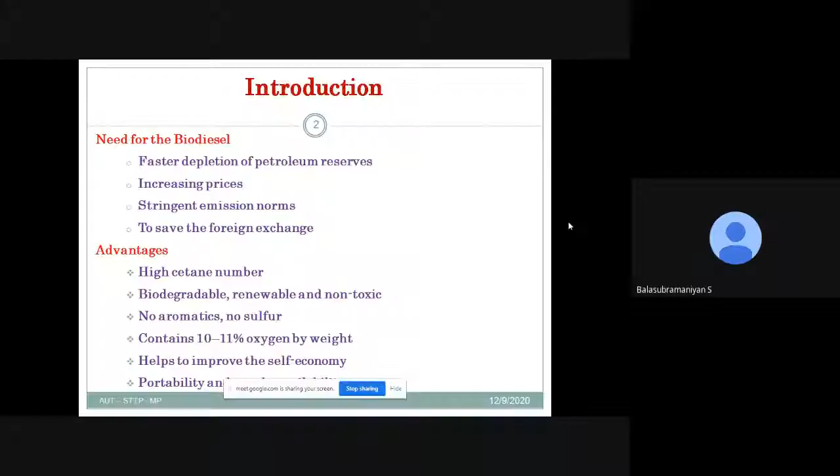What's the need for the biodiesel? Many people might have covered this topic, but let me refresh it and then we'll go to the topic.

The main need for biodiesel is the faster depletion of petroleum reserves, increasing prices of fossil fuels, stringent emission norms, and to save foreign exchange. Not only biodiesel, we can go for alternative fuels, and among them biodiesel is the promising one. So I have taken biodiesel as my fuel for the research.

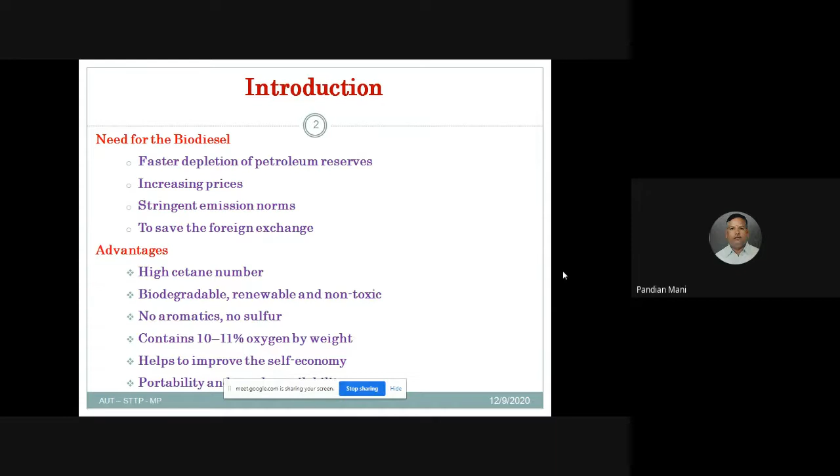The major advantages of biodiesel are high cetane number, biodegradable, renewable, and non-toxic. It contains no aromatics, no sulfur, so there is no problem of acid rain. It contains 10 to 11% oxygen by weight, which is useful for better combustion, and it helps improve the self-economy of any nation.

And it is easy to transport, readily available, and underutilized. So we can make use of this biodiesel as an alternative fuel.

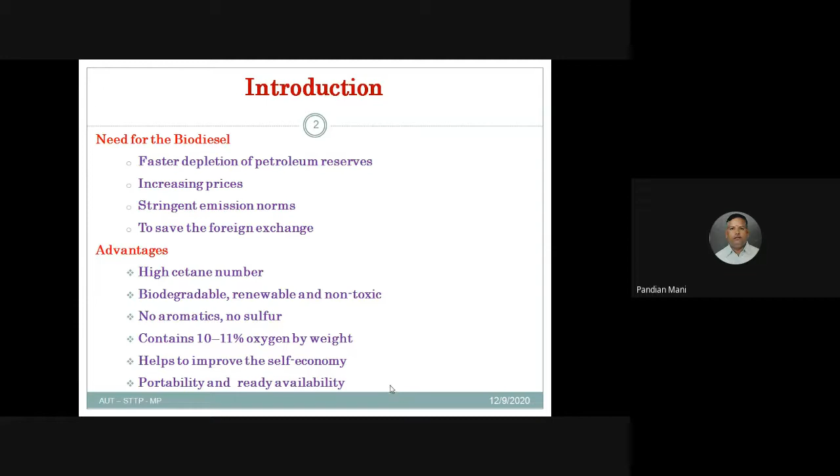Biodiesel is not readily available and it is available as non-edible vegetable oils. These vegetable oils have to be converted into biodiesel by means of acid esterification or base esterification, according to the acid values. So this is the introduction regarding biodiesel usage in ICE engines.

The drawbacks of biodiesel are that it contains lower energy content as the fuel has oxygen in it, so it has lower energy content and is slightly viscous and inferior. It has inferior brake thermal efficiency and more NOx emissions.

So when using biodiesel as a fuel in ICE engines, NOx emission is the major problem that is incurring. We have to identify ways and means to reduce the NOx emission from biodiesel fueled engines so that it can be used for a longer period without any problems. That's why my project aims to reduce the NOx emission from the...

Pandian sir. Yes, sir. Sir, a little louder please. Oh, okay sir. So this project aims to reduce the NOx emission from biodiesel fueled CI engines, sir.

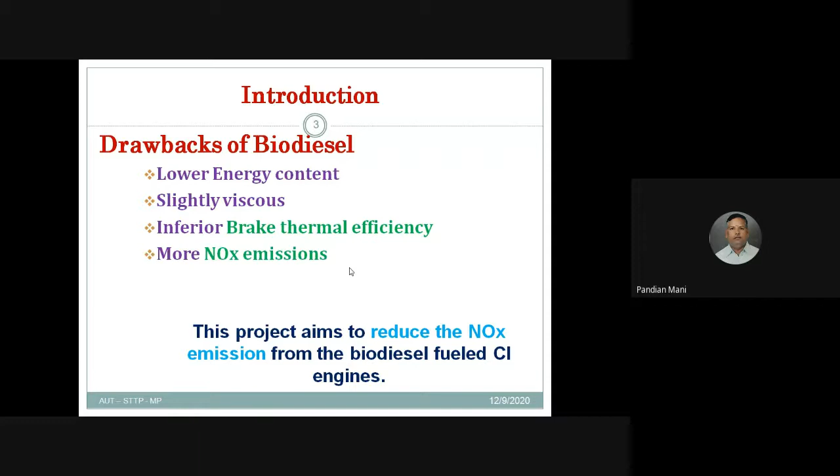I have selected the fuel as Pongamia biodiesel. I selected this because it is available throughout India, it is underutilized, gives a high yield of Pongamia oil from the seeds, is tolerant to high salinity so it can be grown in any location, and it can be grown in waterlogging areas. It is non-edible, that's why I have chosen Pongamia oil as the fuel for my work.

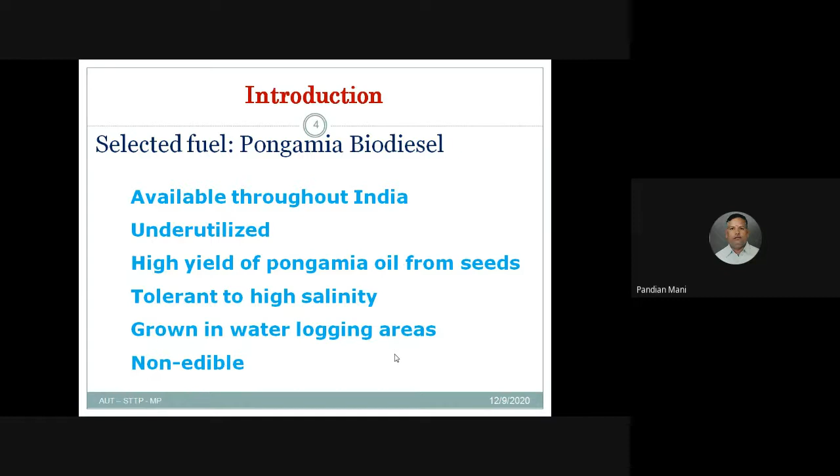There are many ways and means to reduce NOx emissions: modification of engine parameters, recirculation of exhaust gas, usage of cetane improvers, and use of retrofitting devices. But I have taken only the modification of engine parameters as the topic for discussion today.

By controlling the in-cylinder combustion process, as academicians we know very well that NOx emission can be formed only at very high temperatures. At a lesser in-cylinder temperature, NOx emissions will not be formed. Only at higher in-cylinder temperature are NOx emissions found.

Excuse me sir, sorry to interrupt, participants are saying your voice is not audible. Oh, I will check, one minute, I think the system setting needs increasing. I will check it... It is full now, the volume is full. Is it audible now? For me it is okay, I am using an earphone. Many participants have given a comment in the chat box. I don't know where the problem is. Let us see... proceed please.

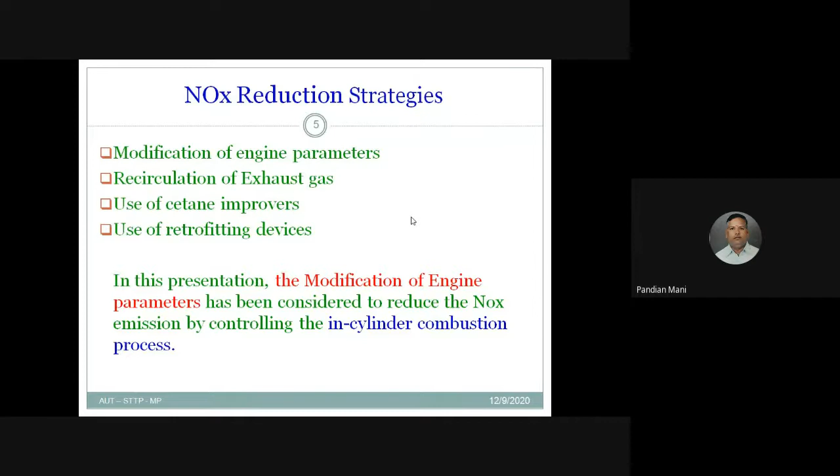Why modify the engine parameters? Because the existing engines are not designed for biodiesel usage. They have been designed only for petrol and diesel usage. So the parameters that can be modified are the bore and stroke (engine size), the compression ratio, and fuel injection parameters like injection timing, injection pressure, and nozzle tip protrusion.

In our research, I cannot change the bore size, stroke size, and compression ratio, because those have to be decided during the design stage itself, not at a later stage. So I am not going to change the bore, stroke, and compression ratio. However, I can change the fuel injection parameters like injection timing, injection pressure, and nozzle tip protrusion.

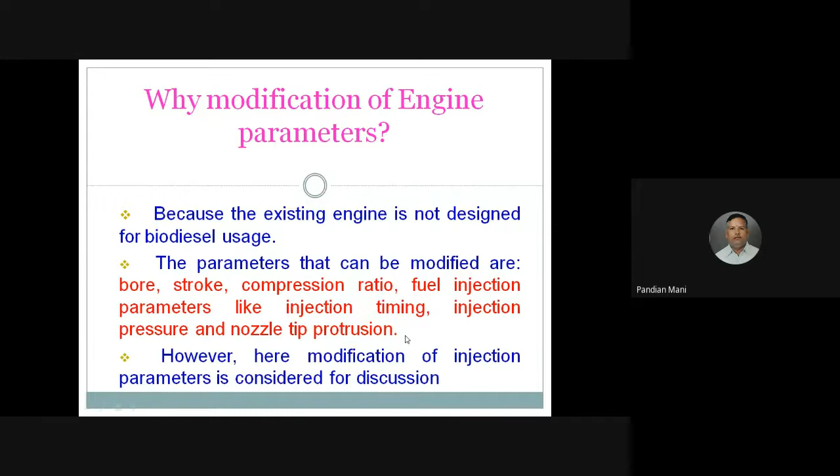Hence, I have considered injection timing, injection pressure, and nozzle tip protrusion as the parameters subject to modification. The objective of this work is to conduct tests on a compression ignition direct injection engine using different blends of biodiesel with petrol diesel, such as B0, B20, B40, B60, B80, and B100, and to obtain the optimum blend and the baseline data.

As you know, B0 indicates fossil diesel, B20 indicates 20% biodiesel mixed with 80% conventional diesel, and B40 means 40% biodiesel mixed with 60% conventional diesel. So the combinations have been formed like that.

The necessity for this is to find the best blend at which the engine works better, giving higher efficiency and lower brake specific energy consumption. In our experimental study, I found that B40 is the best suitable blend for use in existing engines. So I have chosen B40 as my biodiesel blend for use in the ICE engines.

And here, I have chosen the injection parameters as subject to change. In many major research articles, I found that they have studied individually the effects of injection timing, injection pressure, and nozzle tip protrusion, but they have not studied the combined effects of injection pressure, injection timing, and nozzle tip protrusion. That's why I chose this.

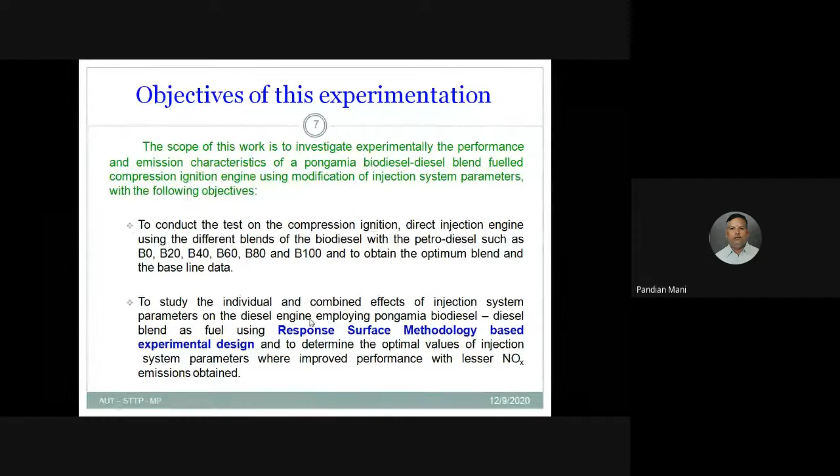So I have used response surface methodology based experimental design.

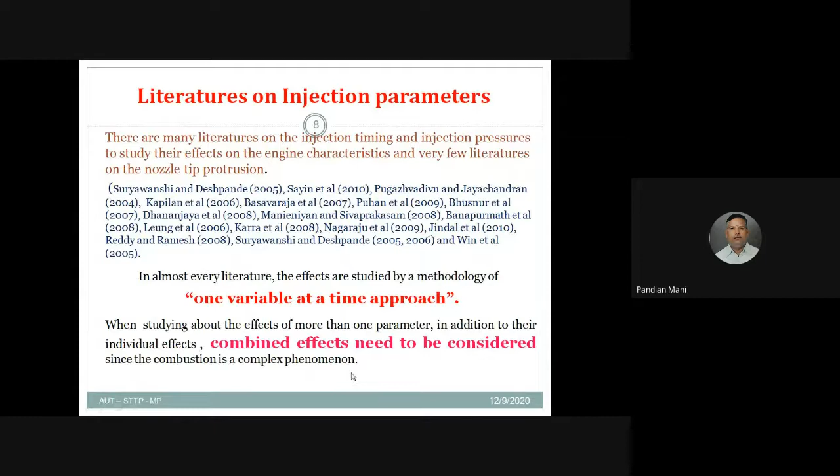Here I have given the literatures that I have gone through. In almost all the literatures, they have studied using a one-variable-at-a-time approach, but in order to study the combined effects, since combustion is a complex phenomenon, we need to study the combined effects of all these parameters.

To study such multivariate problems, there are many tools available, such as fuzzy logic, neural networks, and design of experiments. In this work, I have chosen design of experiments as a tool for studying the combined effects, because it is the most efficient, economical, and user-friendly tool, and it provides the best result with the least number of experiments.

These parameters have been varied at different levels. I have chosen 5 levels of variation in injection timing and injection pressure, and 3 levels of variation in nozzle tip protrusion. The injection timing variation levels are 18, 21, 24, 27, and 30 degree crank angle before top dead center.

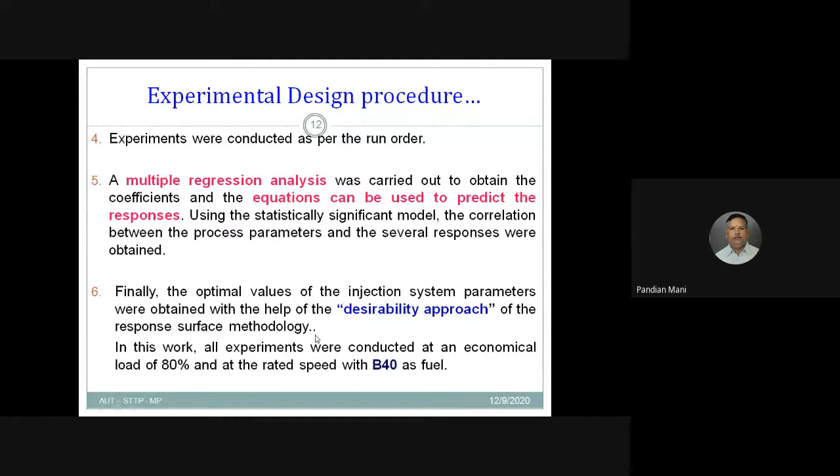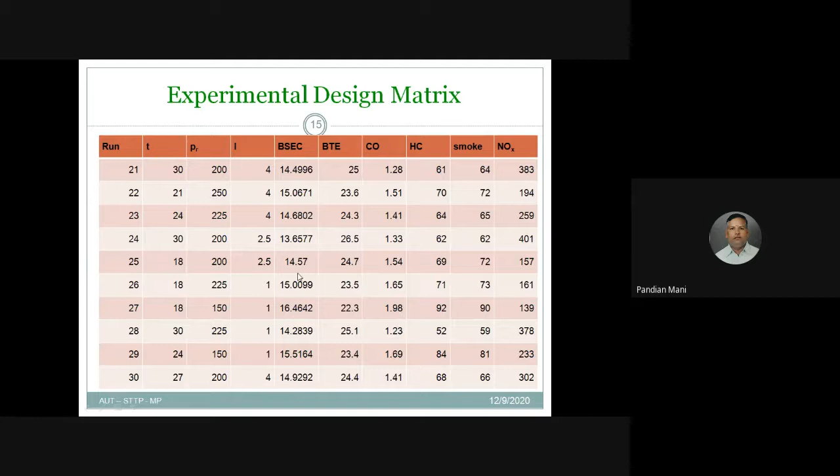So there were 50 runs in total. The experiments were conducted, and it took almost 1 month for conducting all such experiments, because we cannot change the pressure in our laboratory itself.

The injection nozzle has to be taken to the fuel injection service center, where the pressure is changed with the help of tightening or loosening the nut that is held over the compression spring of the nozzles, and it has been varied. The injection timing has been varied by either increasing or decreasing the number of shims added below the injection pump.

This is the nozzle tip protrusion. The injection nozzle is held over the shims. Normally one shim will be there, and by means of increasing or removing the shims, the nozzle tip protrusion length can be changed. So the variations have been performed like that.

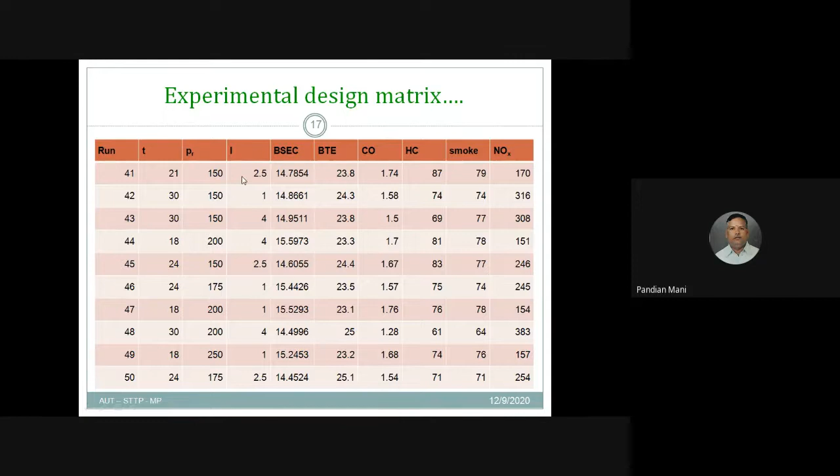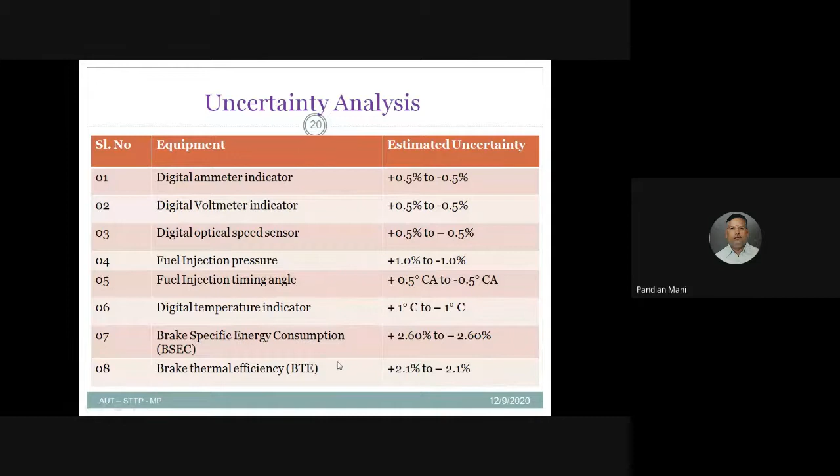I think this has been covered by many people, so I don't want to repeat the same again.

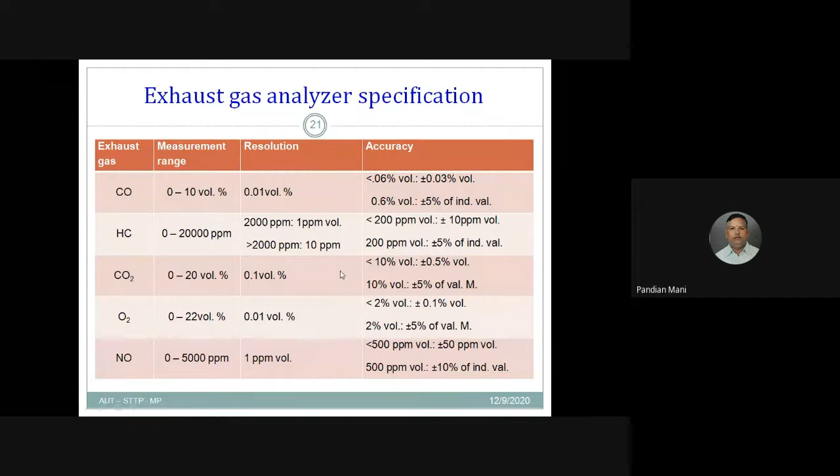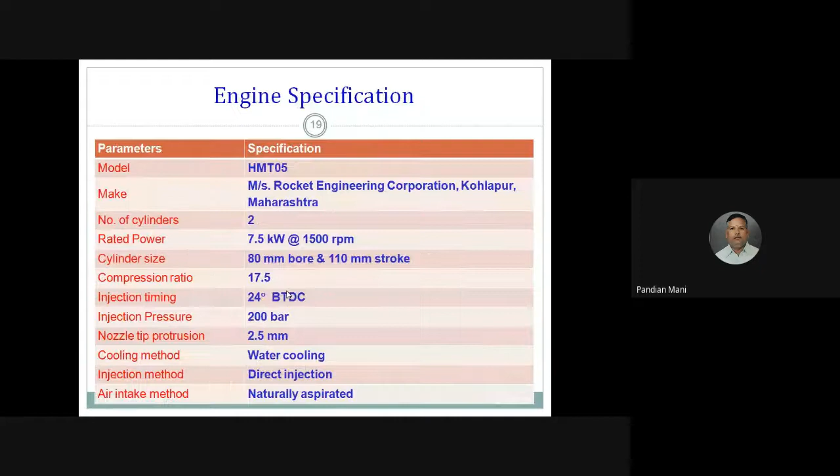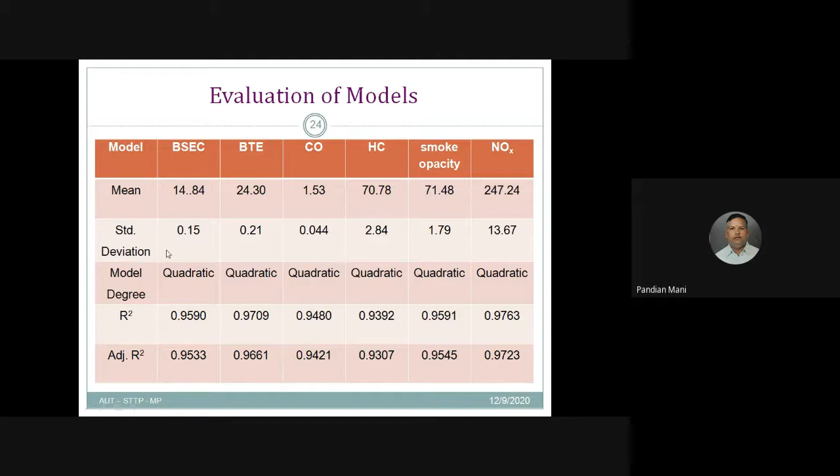And this is the evaluation of the models. Here for each model we have estimated the mean, standard deviation, model degree, R squared values, and the adjusted R squared values. And we found that almost all the models developed for the input parameters as well as for the responses are quadratic models. The standard deviations and mean values have been noted down.

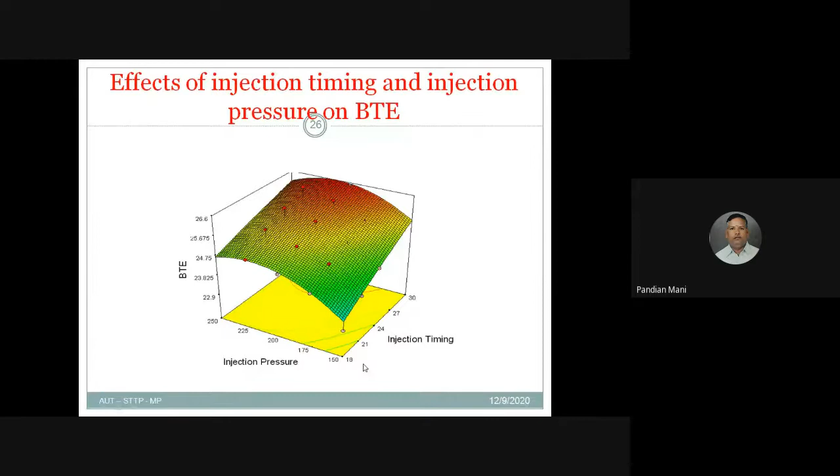This is the effect of injection timing and injection pressure on brake thermal efficiency. Please note, brake thermal efficiency is maximum at an injection pressure of 225 bar, and at an injection timing of 21 degrees we have the highest brake thermal efficiency. Whereas at 30 degree injection timing, the brake thermal efficiency values are changing according to the injection pressures. When injection pressures are increasing, brake thermal efficiency is also increasing, but at the pressure of 250 bar, there is a decrease in the brake thermal efficiency. Similarly, by retarding the injection timing we get lower brake thermal efficiency. Only at 21 degrees it is reducing by reducing the crank angle injection timing; here the brake thermal efficiency value is reduced.

And similarly, this is the effect of injection timing and injection pressure on CO emissions. I hope it is readily and easily understandable, since mostly we may be mechanical engineers with thermal specialization, so you can readily understand the causes of such a parameter. Please note that with the increase in injection pressure, CO emissions are lesser, but this holds up to 225 bar; whereas at 250 bar, we may notice a slight increase in CO emissions. Similarly, CO emissions are very high at 18 degree crank angle before top dead center, whereas at 30 degree crank angle injection timing, the CO emissions are lesser.

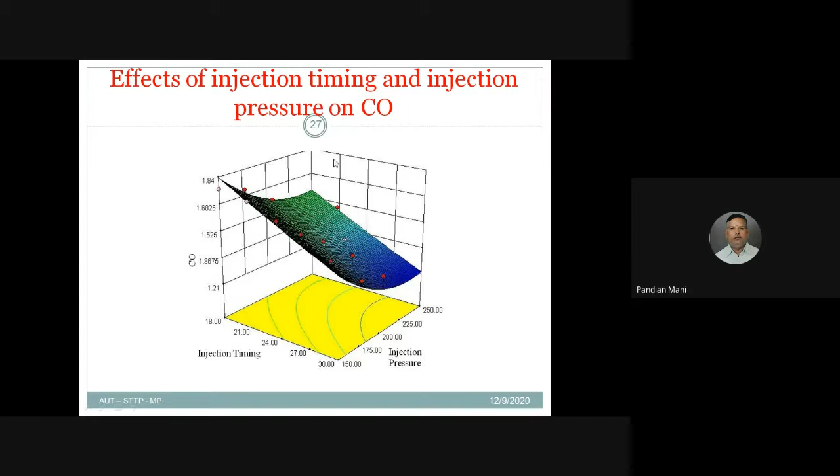We can also visualize the combined effects of injection timing and injection pressure with this graph. This is the NOx emissions, showing the effects of injection timing and injection pressure on NOx emissions. Please note that NOx emissions are very high at pressures of 250 bar and 225 bar, and similarly at a crank angle injection timing of 30 degrees. Whereas at 21 or 18 degree crank angle, the values are found to be lesser.

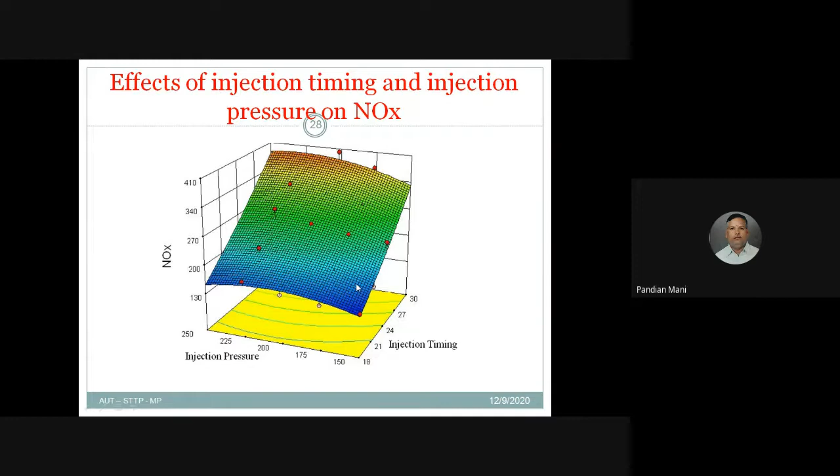And this is the effect of injection timing and injection pressure on smoke opacity. Smoke opacity will be higher at lower pressures, and similarly at 18 degrees. Whereas at 18 degree and 21 degree the values will be maximum, at 27 and 30 degree values the smoke opacity is found to be lesser.

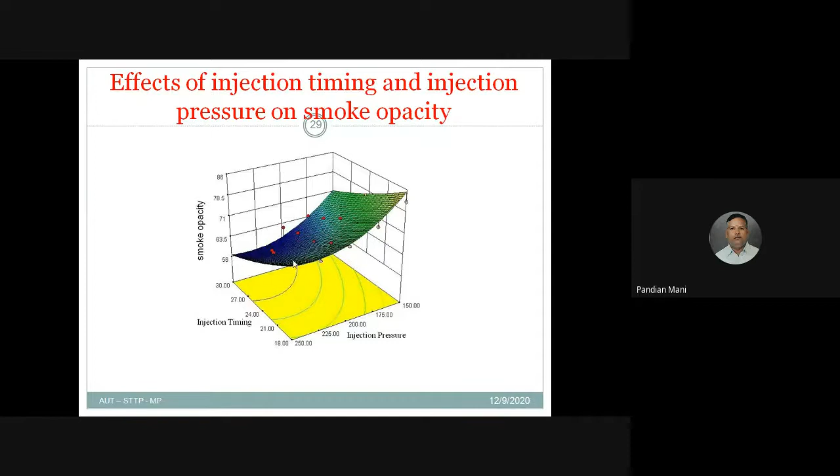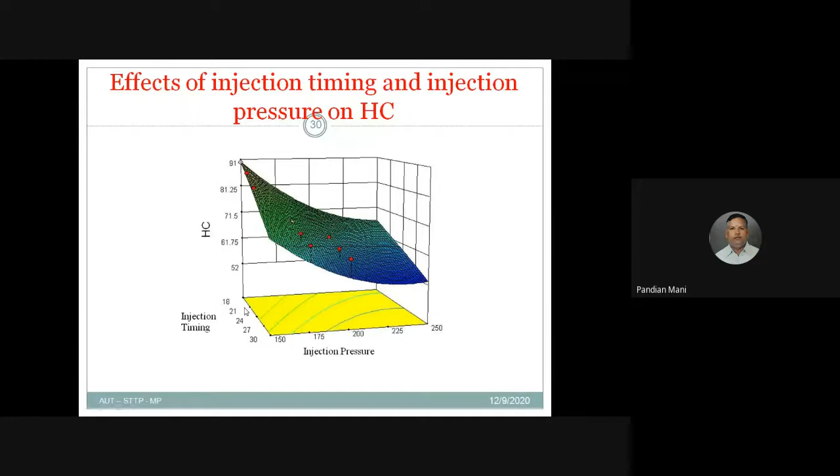This graph shows the impact of injection timing and injection pressure on unburned hydrocarbon emissions. The unburned hydrocarbon emissions are very high at 18-degree injection timing and 150 bar injection pressure, whereas as pressure increases, the unburned hydrocarbon emissions are reduced. Similarly, as the crank angle advances, the HC emissions are also lower.

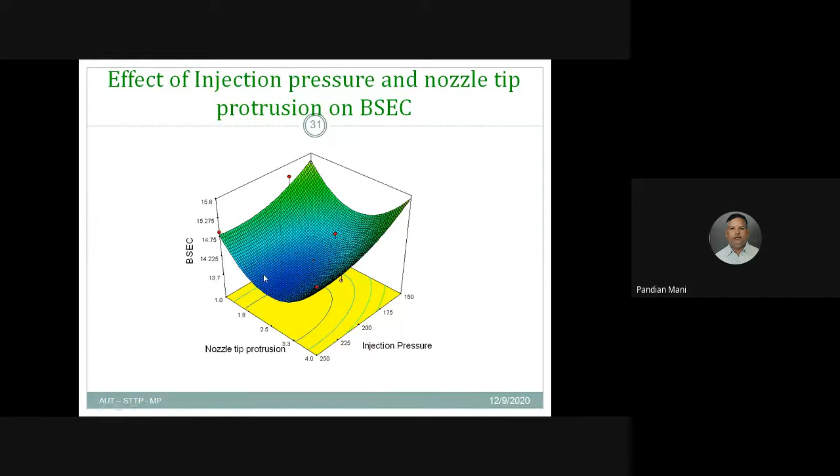Similarly, with the increase in injection pressure, the BSEC values are found to be lower.

Again, this is the curve for BTE. As I told you, only at 2.5 nozzle tip protrusion we have the maximum values. At other points, you may notice lower values.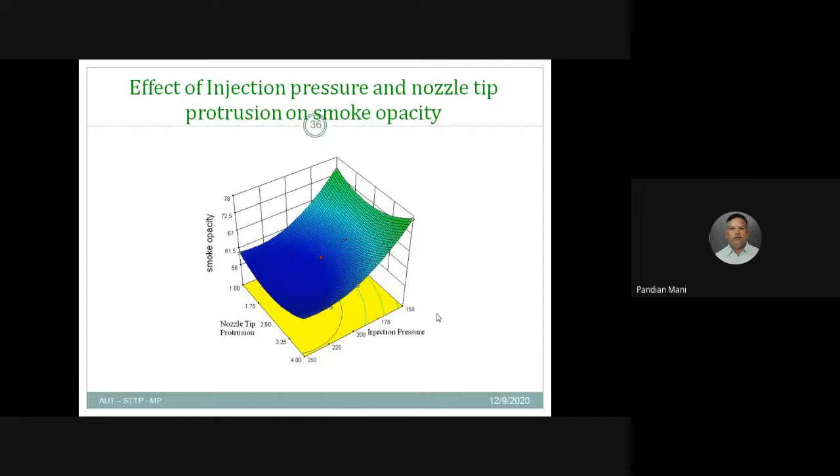Earlier, we discussed the effects of injection timing and injection pressure, then the combined effects of injection pressure and nozzle tip protrusion. Now we are going to see the effects of injection timing and nozzle tip protrusion on the brake specific energy consumption.

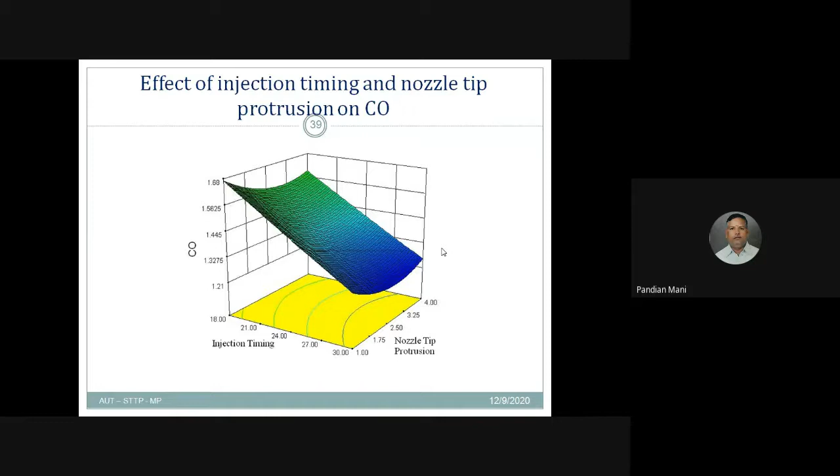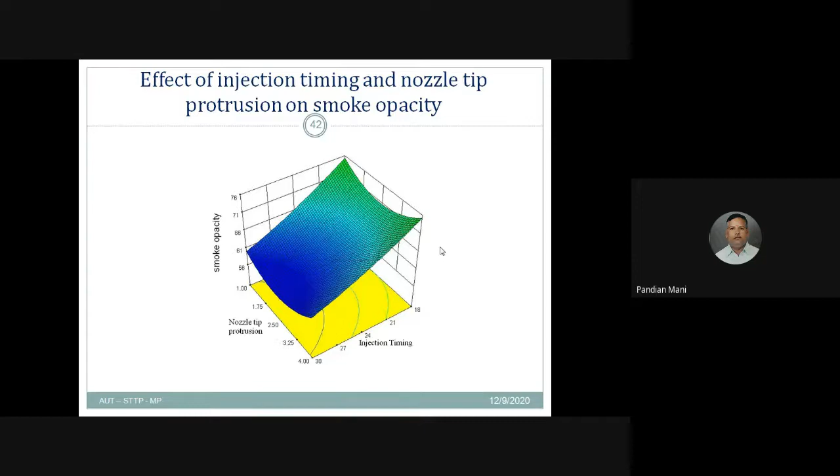Now that the experimental part is over, we have obtained the values and developed the models. We must find out the optimal values at which the engine produces maximum efficiency, consumes lower brake specific fuel consumption, produces lower NOx emission, and all emissions are lower. That is our main objective, so now we are going for the optimization part.

The goal of this work is to reduce NOx emission without significant influence on brake thermal efficiency, because we always want the brake thermal efficiency to be maximum. But if brake thermal efficiency is maximum, NOx emission will automatically be higher, because only with better combustion can we have better thermal efficiency. So when better thermal efficiency is achieved, NOx emissions can be higher due to the mechanism taking place. But we want to reduce NOx emissions without significant influence on brake thermal efficiency.

So there is a paradox between BTE and NOx, as both either increase or decrease together. Hence it is essential to optimize the injection parameters such that NOx reduction is appreciable without much impact on brake thermal efficiency and other emissions.

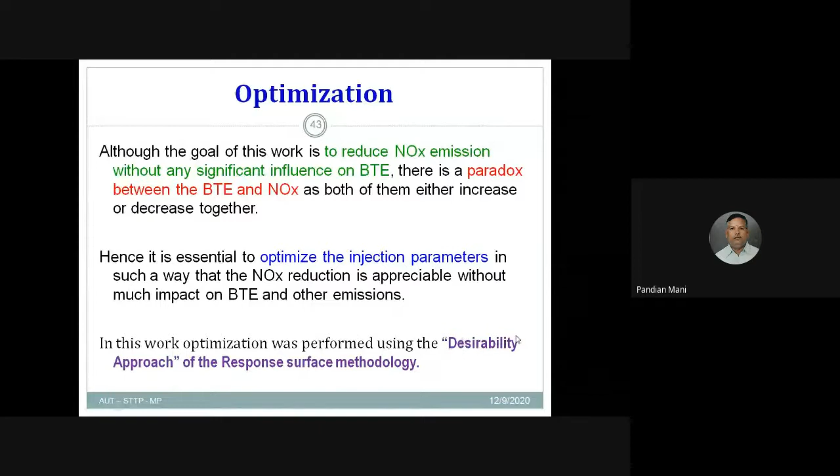In this work, optimization was performed using the desirability approach of response surface methodology. In the software, we use numerical optimization with the desirability approach technique. We chose this approach because it is a kind of numerical optimization that is simple to use, available in the software itself, and flexible in weighting and giving importance to individual responses. That is the biggest advantage of this desirability approach.

In this desirability approach, all the output parameters, that is the responses, are transformed into a non-dimensional quantity called the desirability value, which ranges between 0 and 1.

Okay, so all the output parameters such as the CO, HC, NOx emissions, and the smoke opacity, everything have been transformed into the non-dimensional quantity called the desirability value, which ranges between 0 and 1.

If the desirability value is equal to 0, then the response is completely unacceptable. And if the value of the desirability is equal to 1, then the response is mostly desirable.

So the goal of each response can be either maximize, minimize, target, in the range, or equal to, depending on the nature of the problem. Because in the desirability approach, we can have all such combinations: maximize, minimize, target, range, or equal to, depending upon the nature of the problem.

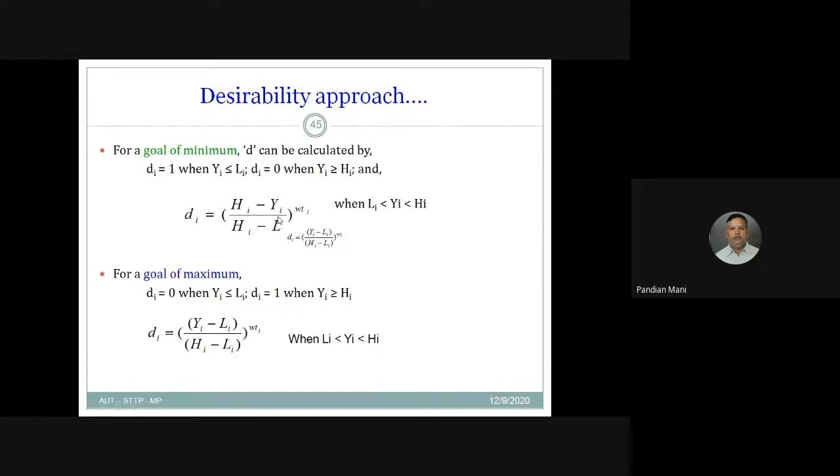So our criterion is that the value of BSEC has to be minimum. So the formula that can be used for such a condition is for a minimum goal. This formula has been used to determine the desirability values, and it is found to be 0.98.

Similarly for brake thermal efficiency, this is the lowest value, and this is the uppermost value, that is 26.59. It is a lower limit because we need to have more thermal efficiency. So the lower limit weightage is 0.1 and upper limit weightage is 1, and similarly importance is 5. Here we maximize because we want more thermal efficiency.

So the criterion for the optimization is maximum. Accordingly the formula has been chosen and used, and the desirability value obtained is 0.97.

Similarly for CO emissions, HC emissions, smoke emissions and NOx emissions, I have chosen the minimum model for all these parameters, since emissions from ICE engines have to be very less. More importance has been given, and less weightage is given on the upper limit side, while higher weightage is given on the lower limit side, because we want to minimize all these emissions.

So I have found that the desirability value of CO is 0.96, for HC it is 0.97, smoke opacity is 0.97, and NOx emission is 0.96. The combined overall desirability function for this experiment is found to be 0.98.

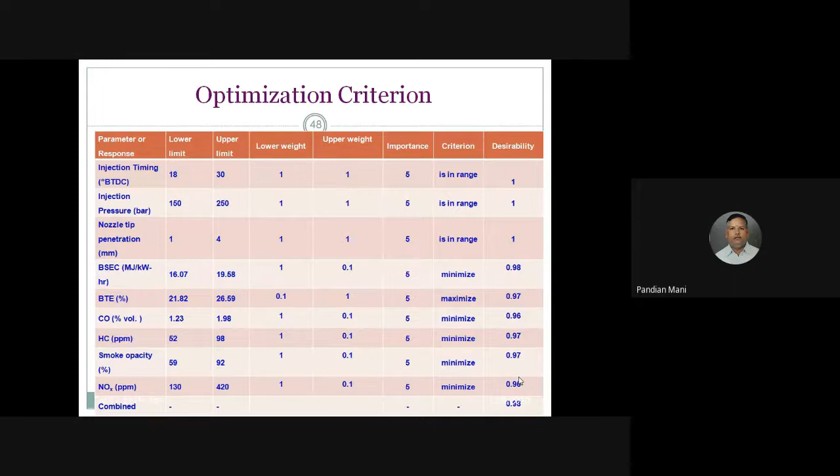So, optimum parameter and validation. From the desirability approach, we found that an overall desirability value of 0.98 was obtained at the optimum injection parameters of 21-degree crank angle before top dead center, 225 bar injection pressure, and 2.5 mm of nozzle tip protrusion. This was obtained from the software itself, which shows these optimal desirability values at 21-degree crank angle before top dead center, 225 bar injection pressure, and 2.5 mm nozzle tip protrusion. This is how we find the optimum parameter.

Once the optimum parameter is obtained, we have to validate whether the result is correct or not. So for that purpose, at these parameters—injection timing of 21-degree crank angle before top dead center, 225 bar injection pressure, and 2.5 mm nozzle tip protrusion—the experiments have been conducted again.

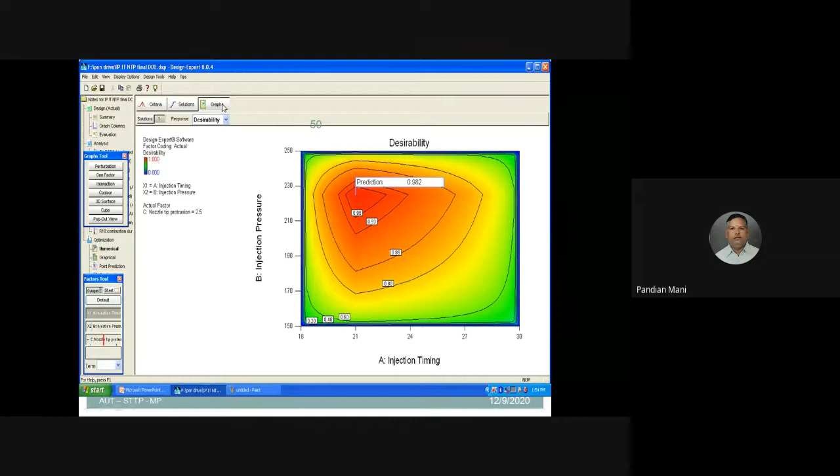Summary of the findings: the brake specific energy consumption, CO, HC, and smoke opacity decrease with the advancement of injection timing from 18-degree BTDC to 30-degree BTDC, but the brake thermal efficiency and NOx emissions increase. With the increase in injection pressure from 150 bar to 225 bar, brake thermal efficiency and NOx emissions increase with a decrease in CO, HC, smoke opacity, and brake specific energy consumption.

When the pressure raised further, there was a negative trend compared to the previous one, because at high pressure the penetration of the fuel will be more, reaching the other end of the surface, and that's why it does not undergo proper combustion. Hence there is an increase in CO and HC emissions when the pressure is at 250 bar.

As for nozzle tip protrusion, the brake specific energy consumption, CO, HC, and smoke opacity were higher at 1 mm and 4 mm of protrusion, with a decrease in brake thermal efficiency and NOx emissions.

With regard to interactive effects, the injection timing and injection pressure had a strong influence on the several responses compared to the other combinations. Compared to injection timing and injection pressure, the nozzle tip protrusion has much less effect, but with reference to interactive effects, injection timing and injection pressure have a strong influence on the several responses.

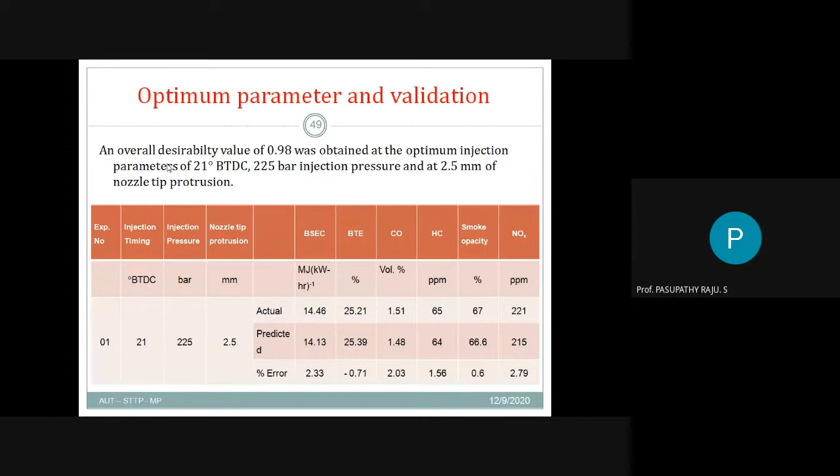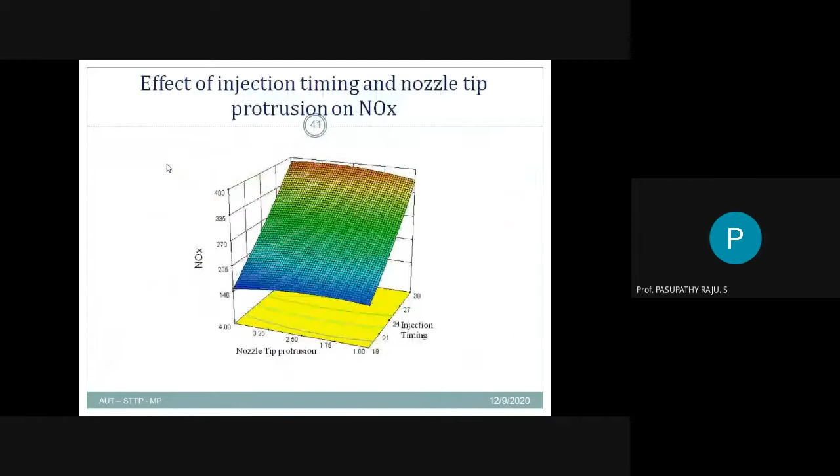One minute sir, I will go to that slide. Experimental design matrix. In the experimental design matrix, sir. Yes sir. So this is the experimental design matrix, and here we have found the T values.

T is the crank angle values in degree crank angle before top dead center, and this is the injection pressure values in bar, and this is the nozzle tip protrusion values. We can take these values, okay.

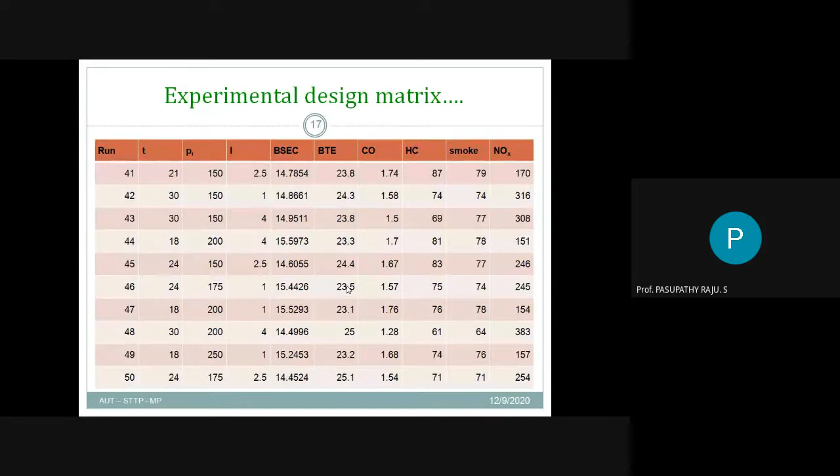Here the only thing is that we have developed the models. There is a point, say BSEC equal to 28.45, minus 0.24 into T, minus 0.07 into pressure, minus 2.08 into L, plus 7.53 into 10 power minus 4 T into PR, plus 1.09 into PR square, plus 0.42 into L square. So now please note that here we have a combination of T into PR.

But we didn't have the combination of T into L, and similarly we didn't have the combination of PR into L. The main reason is, in this case of brake specific energy consumption, we have ignored that interactive effect mainly because the interaction is insignificant. How we have obtained this is by means of this.

So now please note, brake specific energy consumption. Here the PR into L value, the values are greater than 0.0001, so it is insignificant. So this is ignored. Similarly, the effect of T into L, which is the combined effect of injection timing and nozzle tip protrusion, is insignificant.

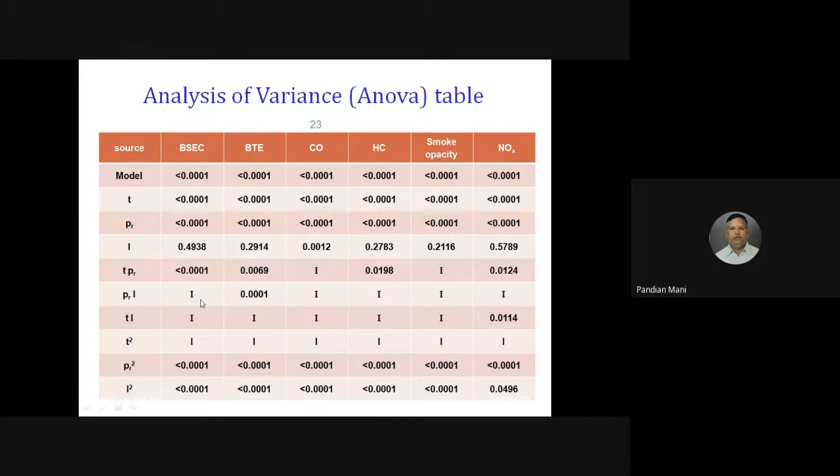Similarly for all the cases. That is the answer for your question, sir.

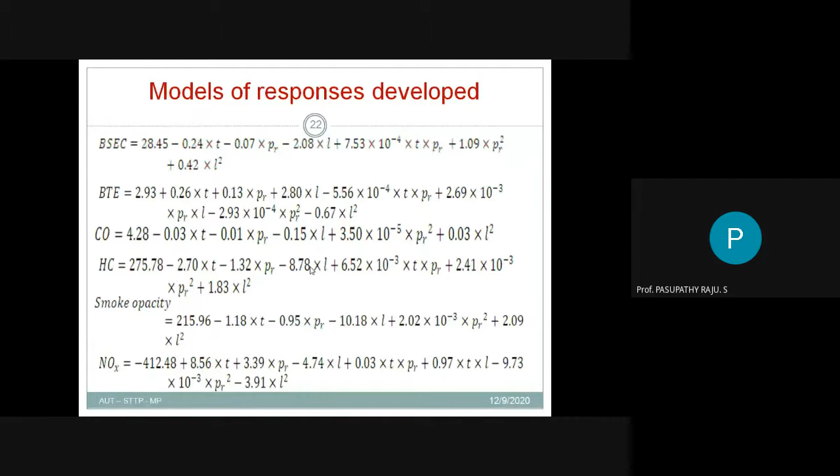One more question sir, numerical optimization. Yes sir. You mentioned d is equal to 1 is acceptable, d is equal to 0 is not acceptable. Yes sir.

Okay, if it is not acceptable, what can we do sir? Because based on these experimental results only we are plotting this. That means it is giving you abnormal results.

That cannot be tolerable because the CO emissions can be higher, and HC emission. You can get the readings, but the readings may not be useful for our future usage. So definitely you have to go for changing the parameters. Only that is the meaning of whether the model is acceptable or unacceptable.